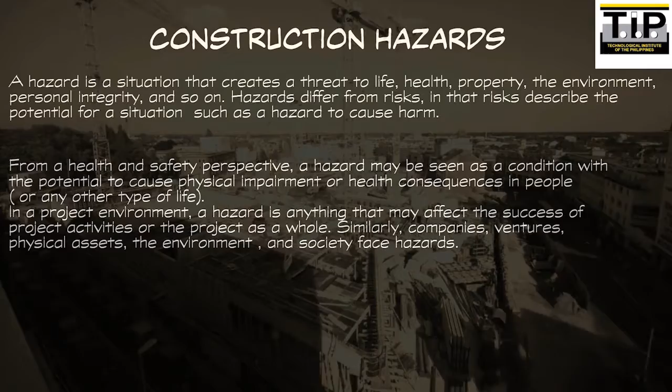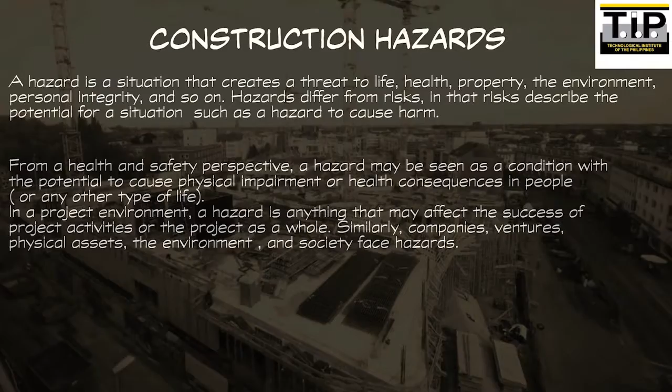In a project environment, a hazard is anything that may affect the success of project activities or the project as a whole. Similarly, companies, ventures, physical assets, the environment, and society face hazards. Most hazards are potential or latent, but if a hazardous situation becomes effective, it can cause an incident, an accident, or even a disaster.

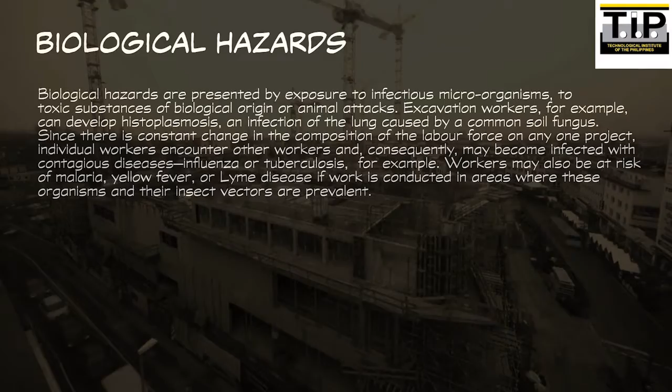Biological hazards. Biological hazards are presented by exposure to infectious microorganisms, to toxic substances of biological origin, or animal attacks. Excavation workers, for example, can develop histoplasmosis, an infection of the lung caused by a common soil fungus.

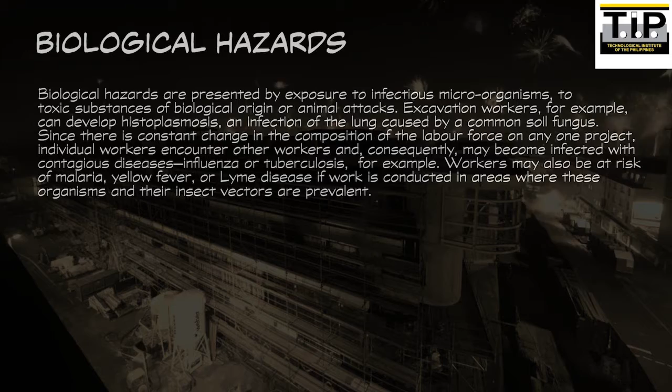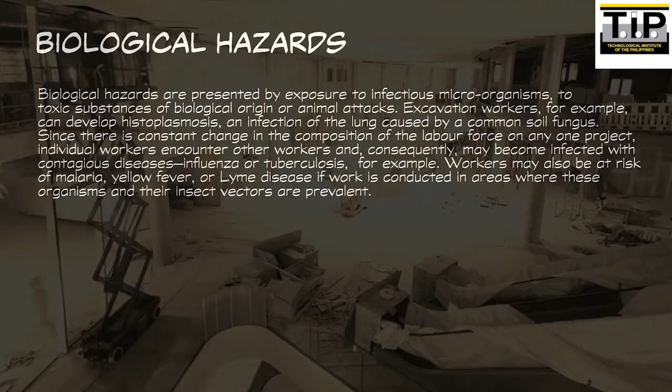Since there is constant change in the composition of the labor force on any one project, individual workers encounter other workers and, consequently, may become infected with contagious diseases, influenza or tuberculosis, for example. Workers may also be at risk of malaria, yellow fever, or Lyme disease if work is conducted in areas where these organisms and their insect vectors are prevalent.

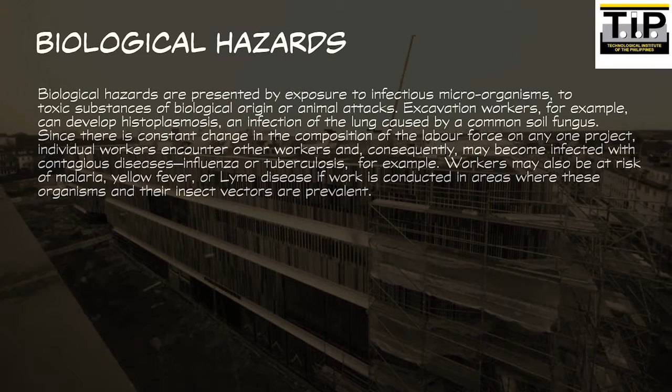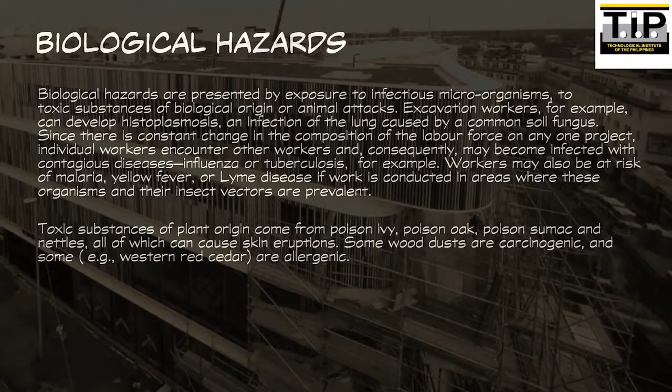Toxic substances of plant origin come from poison ivy, poison oak, poison sumac, and nettles, all of which can cause skin eruptions. Some wood dusts are carcinogenic, and some, for example western red cedar, are allergenic.

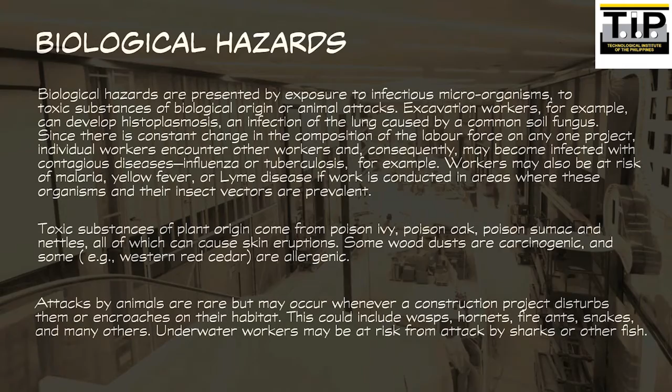Attacks by animals are rare but may occur whenever a construction project disturbs them or encroaches on their habitat. This could include wasps, hornets, fire ants, snakes, and many others. Underwater workers may be at risk from attack by sharks or other fish.

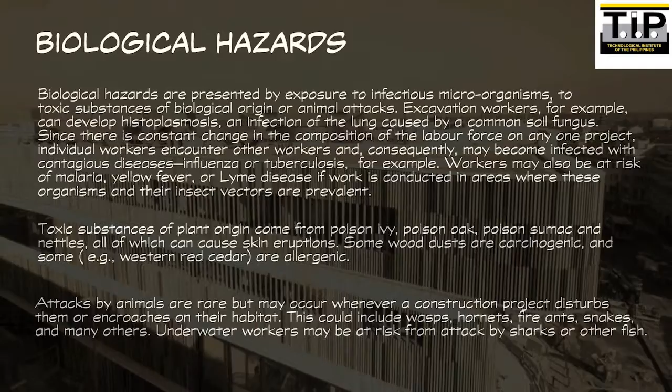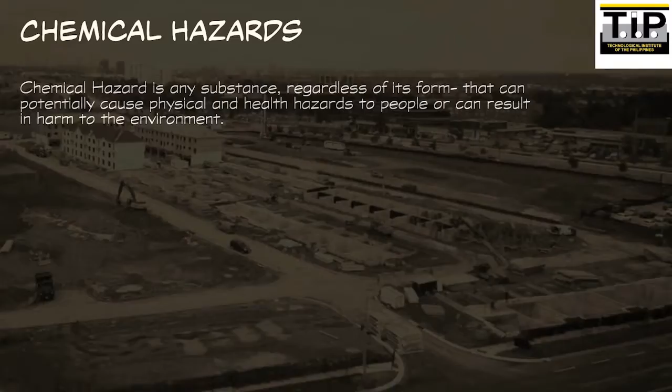Chemical hazards. A chemical hazard is any substance, regardless of its form, that can potentially cause physical and health hazards to people or can result in harm to the environment. Chemicals are widely used in the home, on site, and in many other places. Exposure to chemicals can cause acute or long-term detrimental health effects.

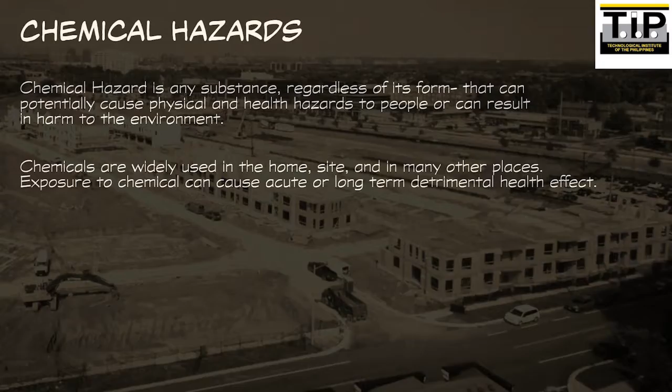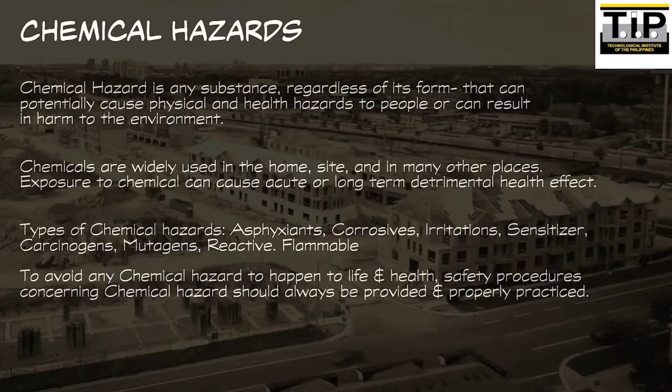Types of chemical hazards: asphyxiants, corrosives, irritants, sensitizers, carcinogens, mutagens, reactive, and flammable. To avoid any chemical hazard from occurring, life and health safety procedures concerning chemical hazards should always be provided and properly practiced.

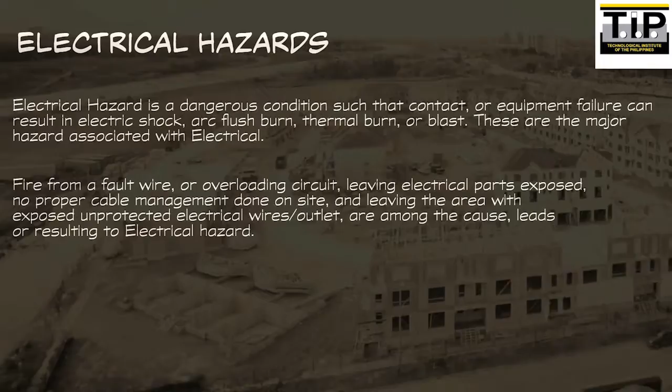Electrical hazards. An electrical hazard is a dangerous condition such that contact or equipment failure can result in electric shock, arc flash burn, thermal burn, or blast. These are the major hazards associated with electricity. Fire from a faulty wire or overloading circuit, leaving electrical parts exposed, no proper cable management done on site, and leaving the area with exposed unprotected electrical wires or outlets are among the causes leading to electrical hazards. To avoid these things from happening, life and health safety procedures concerning electrical hazards should always be provided and properly practiced.

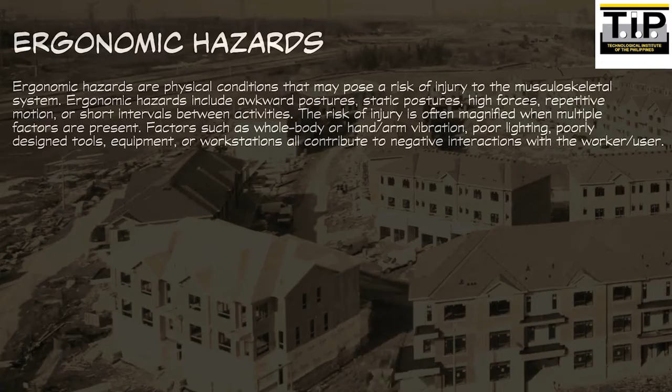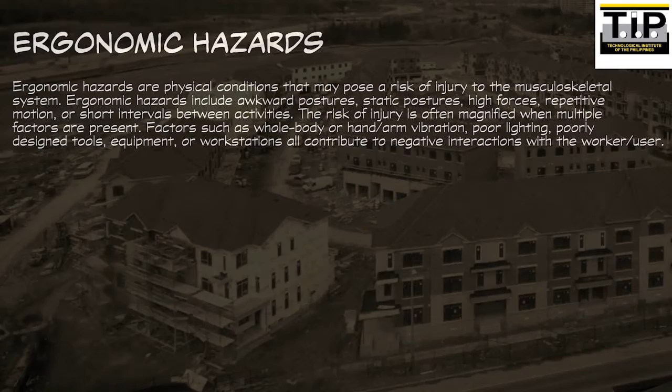Ergonomic hazards. Ergonomic hazards are physical conditions that may pose a risk of injury to the musculoskeletal system. Ergonomic hazards include awkward postures, static postures, high forces, repetitive motion, or short intervals between activities. The risk of injury is often magnified when multiple factors are present.

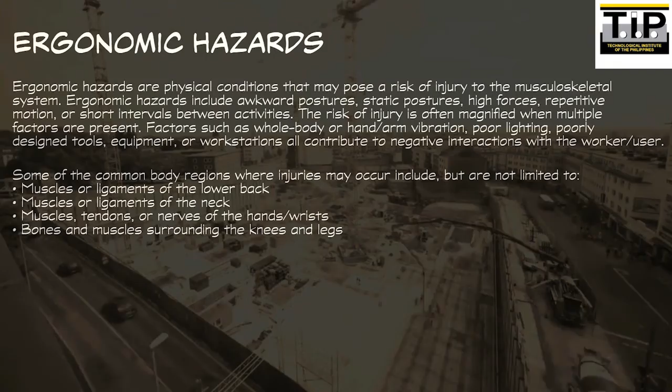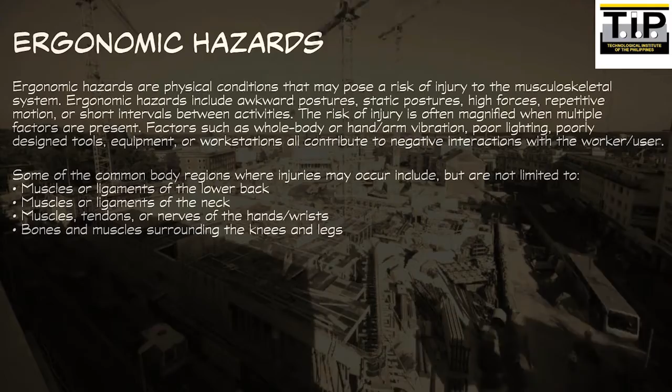Factors such as whole body or hand/arm vibration, poor lighting, poorly designed tools, equipment, or workstations all contribute to negative interactions with the worker/user. Some of the common body regions where injuries may occur include, but are not limited to, muscles or ligaments of the lower back, muscles or ligaments of the neck, muscles, tendons, or nerves of the hands/wrists, and bones and muscles surrounding the knees and legs.

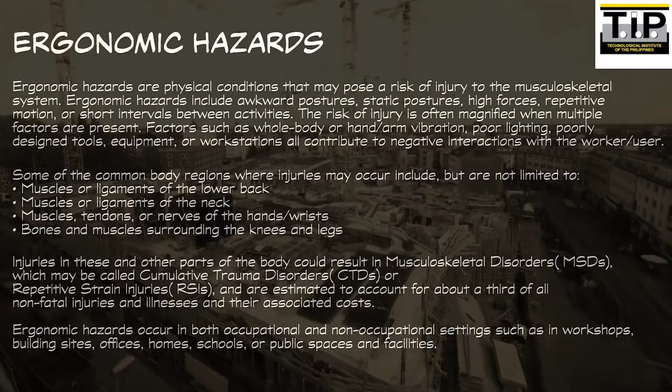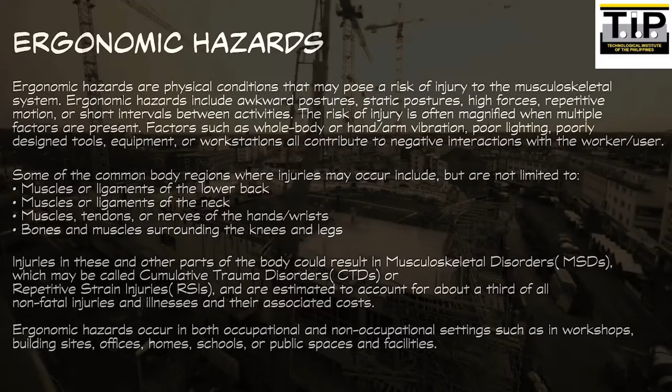Injuries in these and other parts of the body could result in musculoskeletal disorders, MSDs, which may be called cumulative trauma disorders, CTDs, or repetitive strain injuries, RSIs, and are estimated to account for about a third of all non-fatal injuries and illnesses and their associated costs.

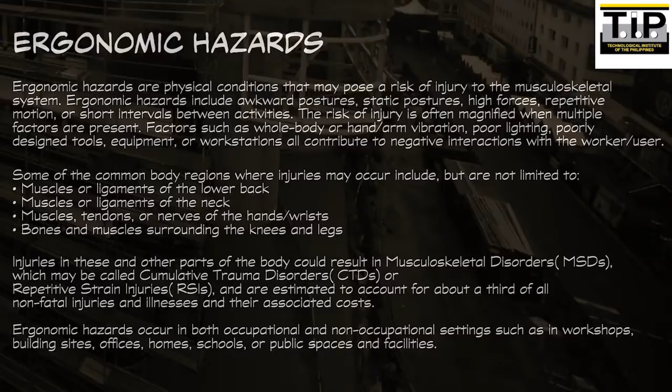Ergonomic hazards occur in both occupational and non-occupational settings such as in workshops, building sites, offices, homes, schools, or public spaces and facilities. Mechanical hazards.

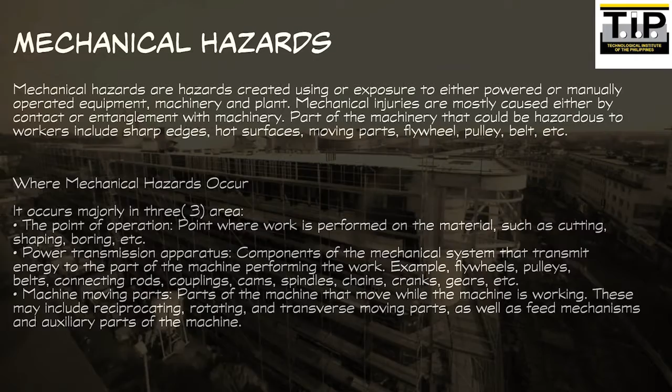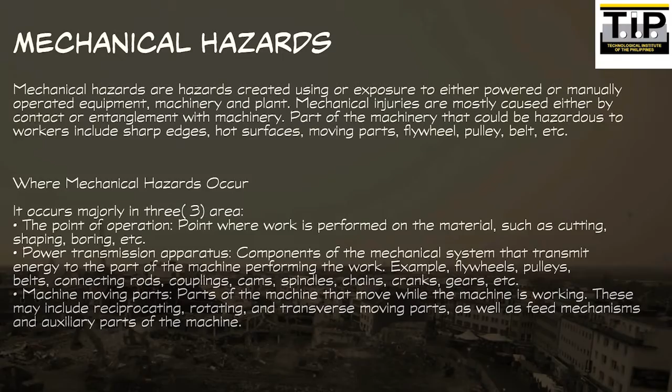Mechanical hazards are hazards created by using or exposure to either powered or manually operated equipment, machinery and plant. Mechanical injuries are mostly caused either by contact or entanglement with machinery. Parts of the machinery that could be hazardous to workers include sharp edges, hot surfaces, moving parts, flywheel, pulley, belt, etc.

Where mechanical hazards occur: it occurs majorly in three areas. The point of operation, the point where work is performed on the material, such as cutting, shaping, boring, etc.

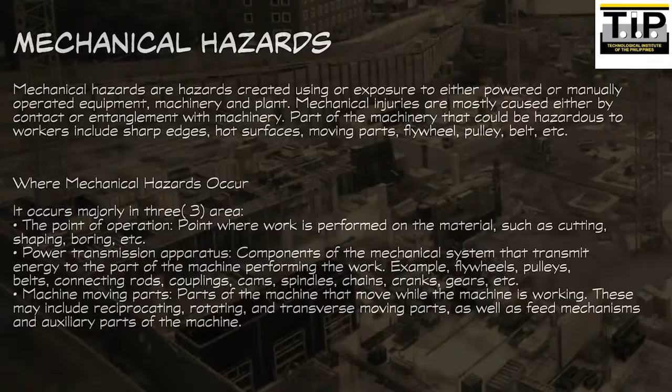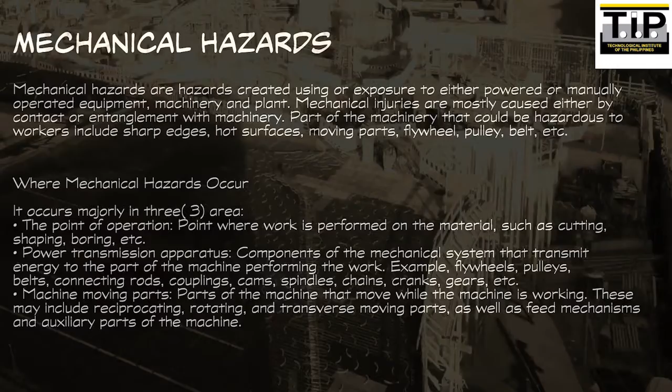Power transmission apparatus: components of the mechanical system that transmit energy to the part of the machine performing the work. Examples include flywheels, pulleys, belts, connecting rods, couplings, cams, spindles, chains, cranks, gears, etc.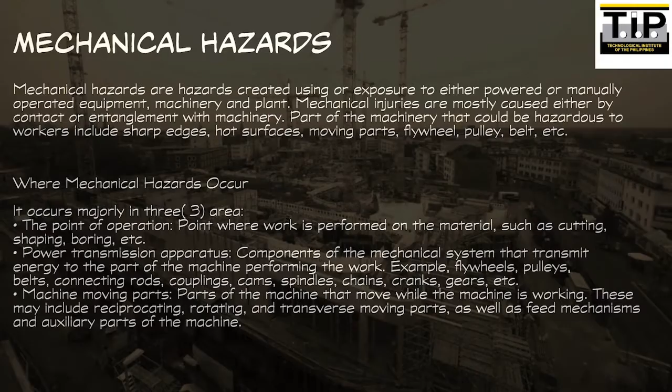Machine moving parts: parts of the machine that move while the machine is working. These may include reciprocating, rotating, and transverse moving parts, as well as feed mechanisms and auxiliary parts of the machine.

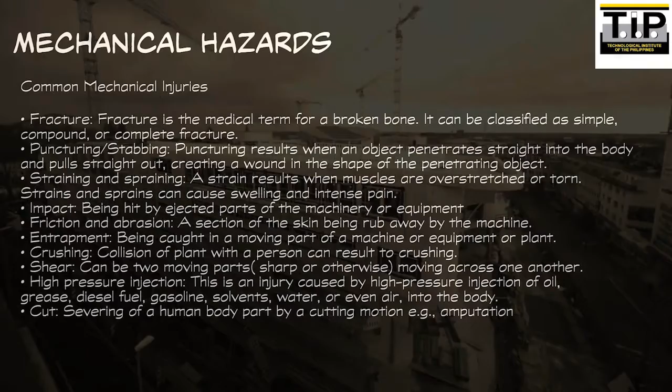Common mechanical injuries. Fracture: fracture is the medical term for a broken bone. It can be classified as simple, compound, or complete fracture. Puncturing/stabbing: puncturing results when an object penetrates straight into the body and pulls straight out, creating a wound in the shape of the penetrating object.

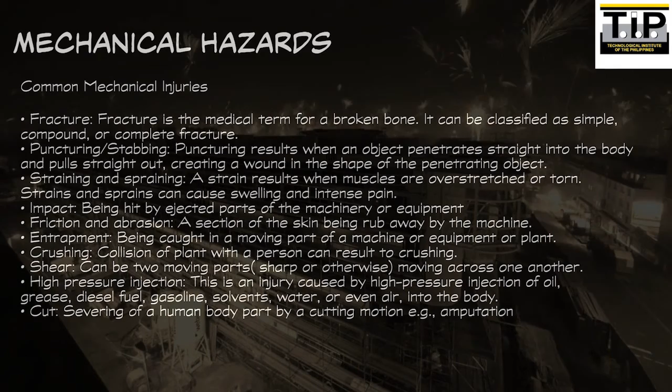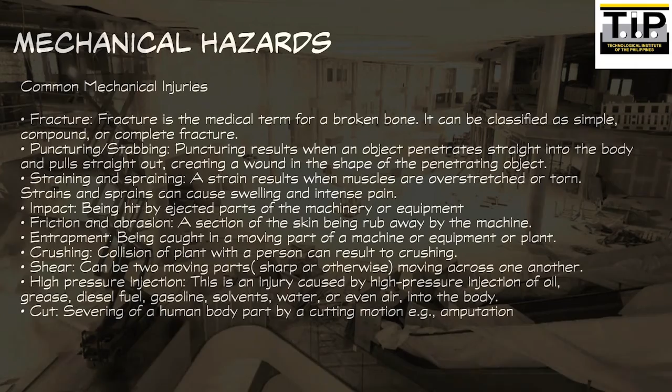Straining and spraining: a strain results when muscles are overstretched or torn. Strains and sprains can cause swelling and intense pain. Impact: being hit by ejected parts of the machinery or equipment. Friction and abrasion: a section of the skin being rubbed away by the machine.

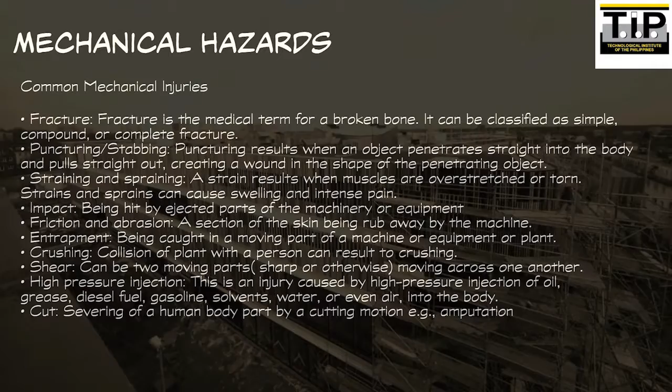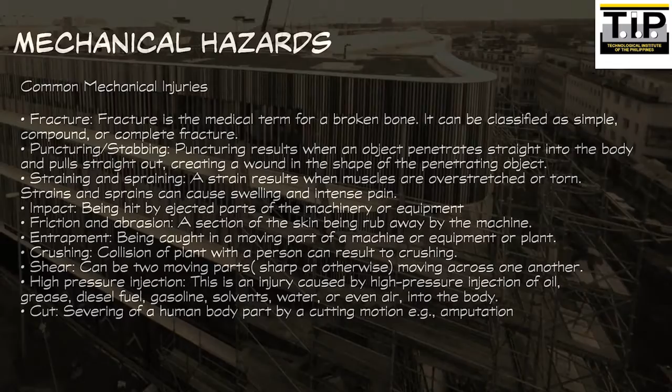Entrapment: being caught in a moving part of a machine, equipment, or plant. Crushing: collision of plant with a person can result in crushing. Shear: can be two moving parts, sharp or otherwise, moving across one another.

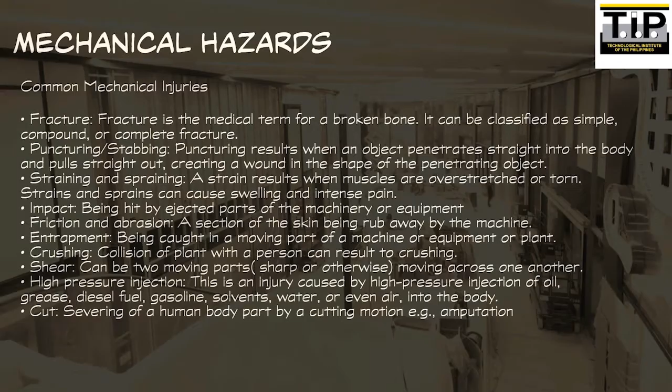High pressure injection: this is an injury caused by high pressure injection of oil, grease, diesel fuel, gasoline, solvents, water, or even air, into the body. Cut: severing of a human body part by a cutting motion, example, amputation.

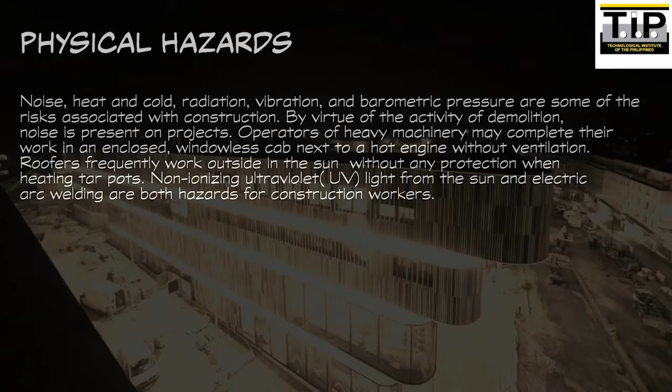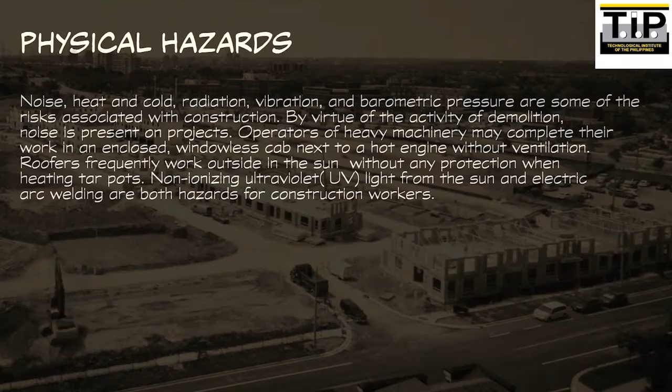Physical hazards. Noise, heat and cold, radiation, vibration, and barometric pressure are some of the risks associated with construction. By virtue of the activity of demolition, noise is present on projects. Operators of heavy machinery may complete their work in an enclosed, windowless cab next to a hot engine without ventilation. Roofers frequently work outside in the sun without any protection when heating tar pots.

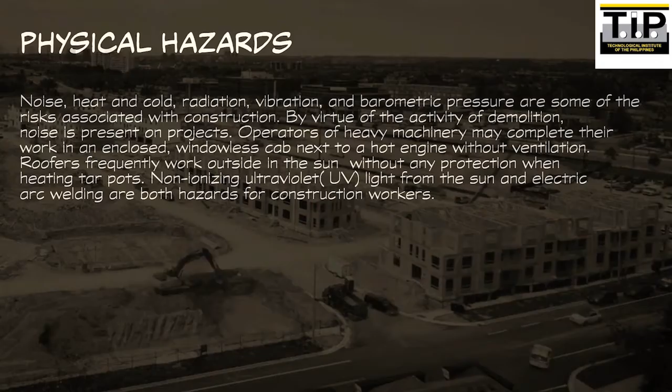Non-ionizing ultraviolet (UV) light from the sun and electric arc welding are both hazards for construction workers. Ionizing radiation exposure is less frequent but can happen, for instance, during an X-ray check of a weld. More and more people are using lasers, which pose a risk of harm if the beam is deflected, especially to the eyes. Decompression illness and inert gas poisoning are risks for high-pressure employees.